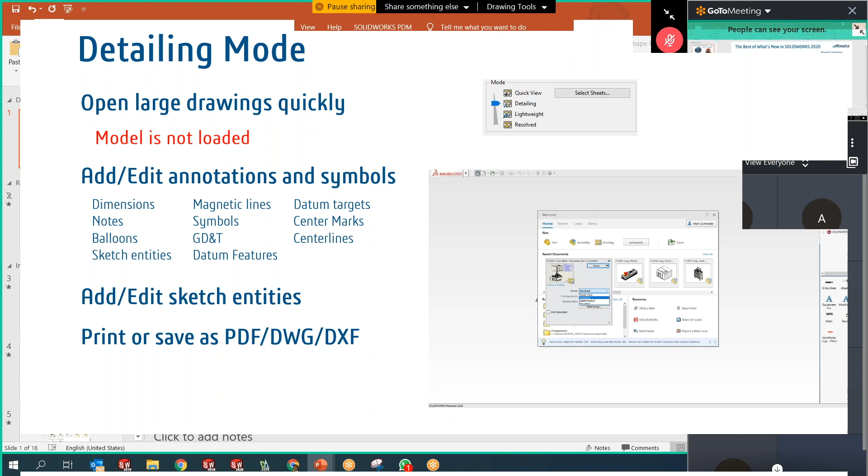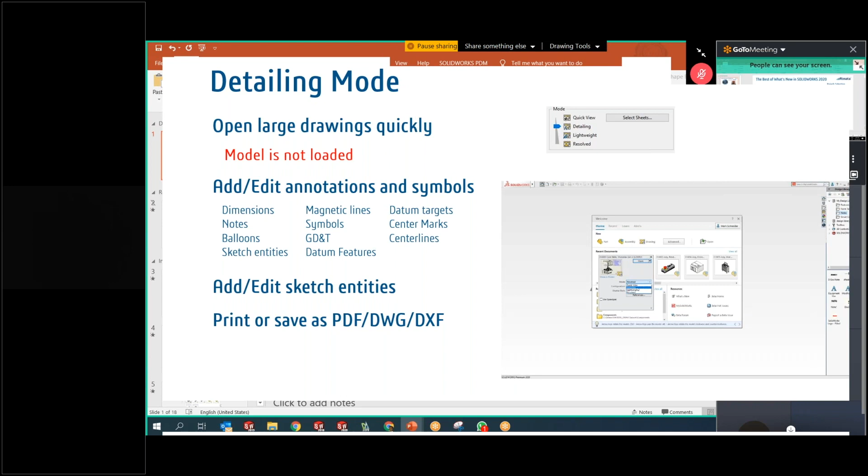Okay. In this case, the model is not loaded, so your system is able to take in more capacity of memory. It can handle more of the drawing's memory. And in this mode, you can also add and edit annotation symbols like magnetic lines, your symbols, your GD&T, your dimensions, notes. So all these features are available in this particular mode. You can add sketch entities, you can edit sketch entities, and also you can save this as a PDF. Okay, let's see this in action.

So here I'm opening my drawing, which is a really resource-intensive drawing. When I open my drawing, I have selected the detailing mode. So what SolidWorks does is it opens this drawing in the detailing mode, and you can see all my drawing sheets are available. So there is no loss of any data in the detailing mode. All my drawing sheets are available. You can see all the views, you can see all the dimensions.

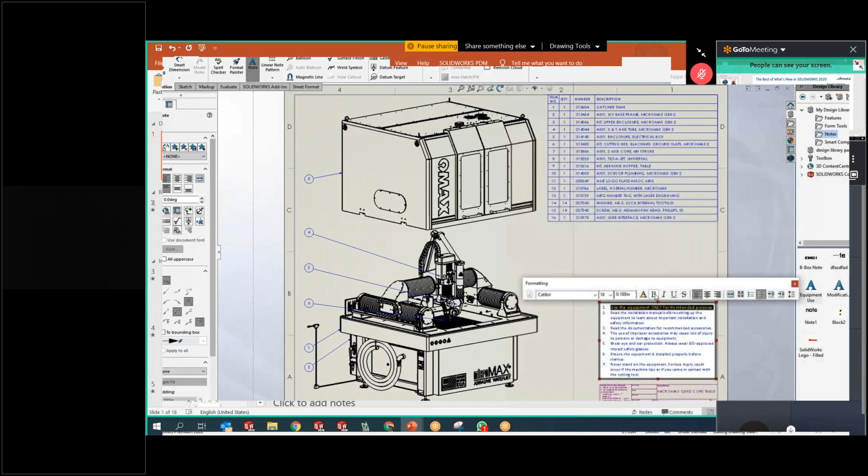Now you can also edit these balloons, put them to magnetic lines. You can edit notes, add notes. So this capability is there with the detailing mode. I can edit my notes quite fast. And remember, this mode opens the drawing very fast. Okay. So in this sheet, I need to adjust my view. I find this is more clumsy. I would like to shift this view to another sheet.

So I cut my view, I open a new sheet, and it's just as easy as pasting your view onto the sheet. So I just paste my view here, and you can rearrange your dimensions. So here I rearrange my dimensions. You can also make use of the ballooning option. You can make use of the magnetic lines, add balloons to your drawings. Adding dimensions is quite easy.

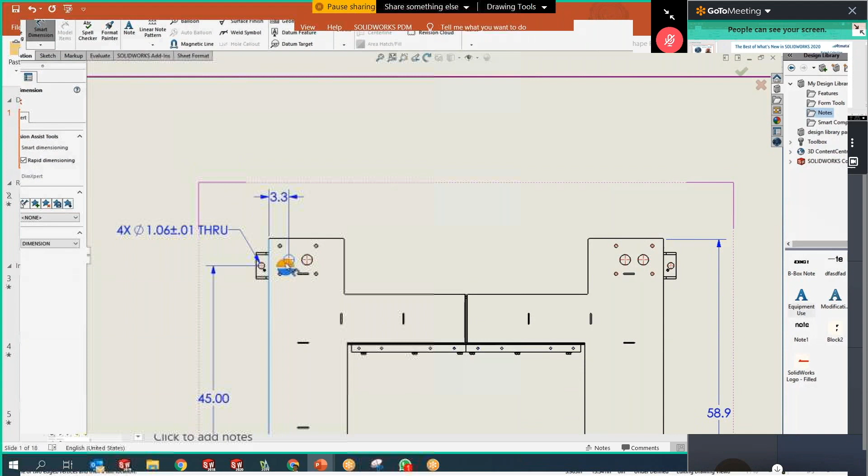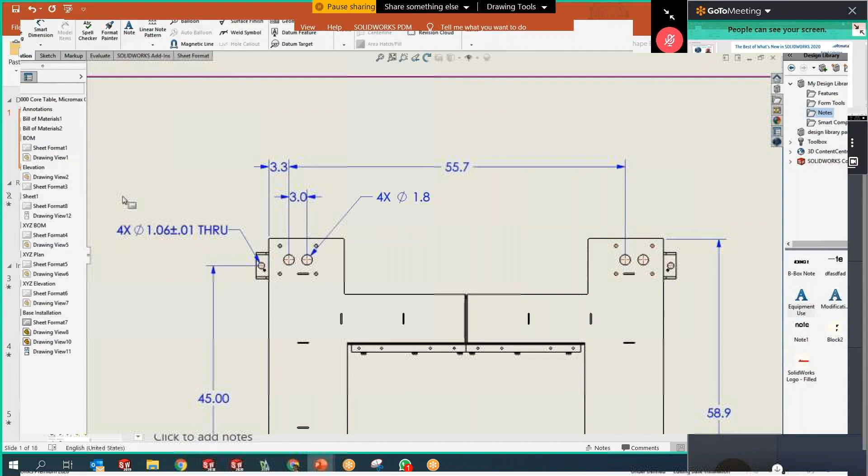So on the fly, I would like to just select entities of my scope. I pick entities which I need to dimension. It's just as easy as the familiar workflow of adding dimensions on the fly. Once my dimensions are added, I have the option to also add information to the dimension. In this case, I'm adding 4 as the number of holes. You have the format painter option where you can match dimension styles very fast. So what we see here is all capabilities are available in the detailing mode.

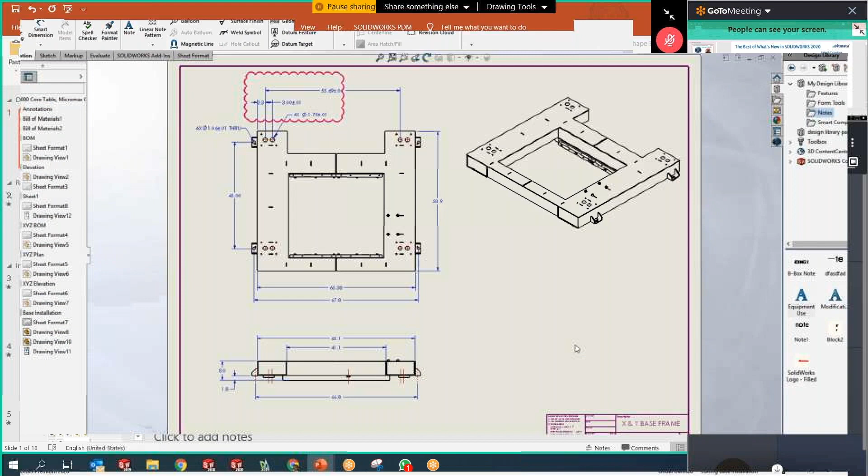So I put some revision clouds, and then I can also save my drawing. I can save this as a DWG, as a PDF file also. So let me save this as a PDF file. I have the option where I can select the PDF option, and you can see all the sheets are ready to be exported to a PDF file. So here I have all my sheets. I have all my views available in the PDF file.

So I would urge you to make use of this option. With this option, handling massive drawings is quite easy and quite rapid. You can open it fast. With all your configurations, and with lots of information in your sheets, it's easy to manage it with the detailing mode.

Okay, this is also related to performance, where some of the users say that when I open a large assembly, the performance of my system reduces. This can be because of various reasons. So we have an option where we use the large design review edit mode. The large design review edit mode is something where you can review large designs in your assembly quite fast. So you save time on your navigation. The time taken to navigate your assemblies, the time taken to modify your assemblies, you save time in the large design review edit mode.

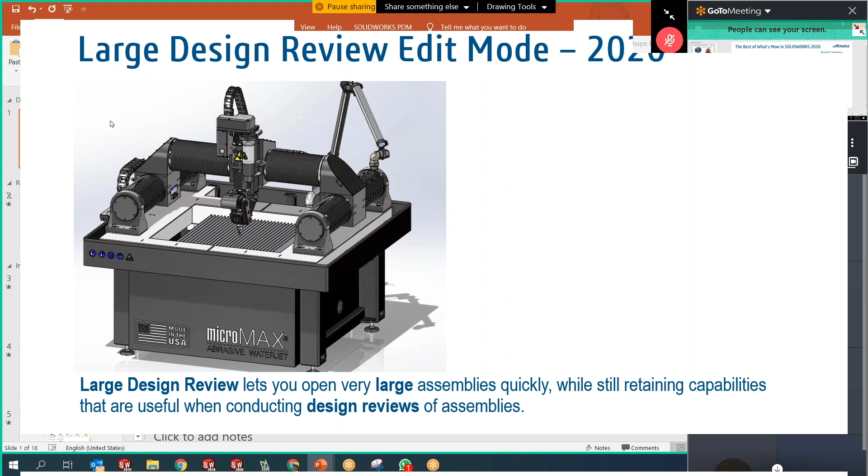So this was actually introduced in 2012. We have some options which were introduced in 2012, like you can navigate the feature manager design tree, selectively open components, you can measure distances.

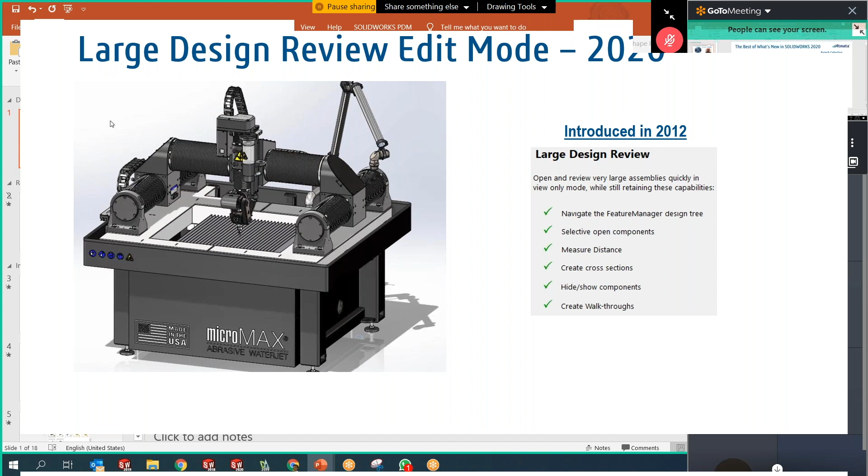So while editing the assembly, some features were added in 2012. Now with 2019, they have added more features into it. So we have options where we can insert components, delete components, move and rotate components. So additional features, additional capabilities have been added into the large design review mode.

In 2020, they have inserted some more features, which are more for quick access. So we have copy paste, so you can do Control-C, Control-V. You can drag and drop components into your assembly. Also, you can use Shift Tab, the familiar way of using Shift Tab in your assemblies, to hide and show components. And they have added the zoom to selection option.

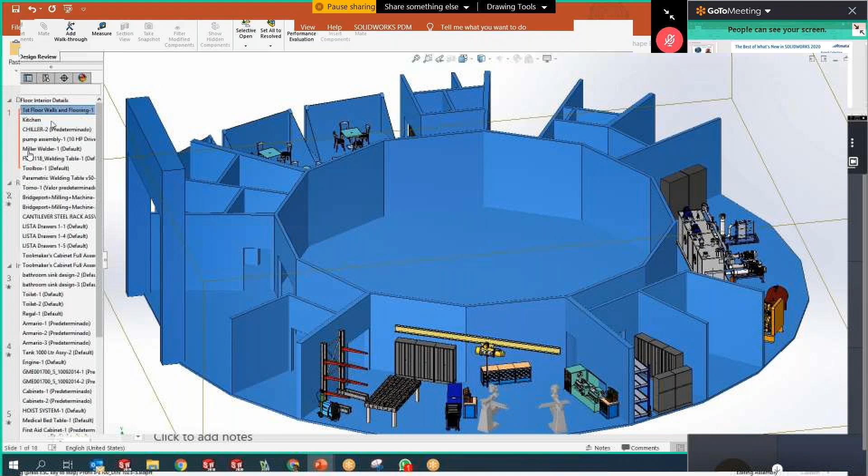I just want to show you this in action. So here I'm going to open a very large assembly. I'm opening this drawing in large design review mode. When I open it in large design review mode, as you can see here, only the lightweight components, just as graphics reference, have been loaded into the memory.

So it's very easy for me to navigate, to rotate. I can also use the measure tool in the large design review mode to measure components. I can create sections, view sections, use the section plane option. And also I can select components and hide and show them. So these options are available with the large design review mode.

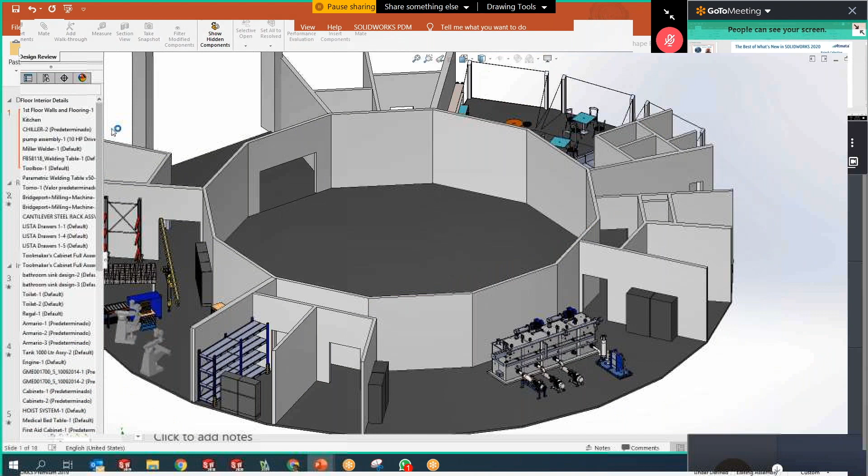If I want to edit a particular assembly, you just right click the component and say edit assembly. As you can see here, all the features related to that particular component are being shown. So it's been loaded into memory. So I have my constraints, my sketches. So I can show my sketches. Also, if required, I can select my assemblies and delete them.

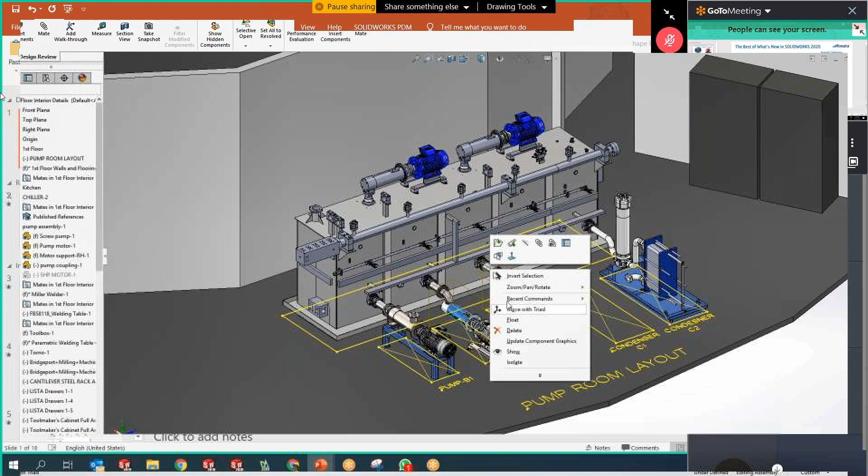So I can delete assemblies and also insert assemblies into this large design review assembly. So additional assemblies can also be inserted. And once I insert this component, let me constrain this. So I can use my constraints. The whole flexibility, the option to use my constraints, is available with the large design review mode. So let me insert another component, another sub-assembly here.

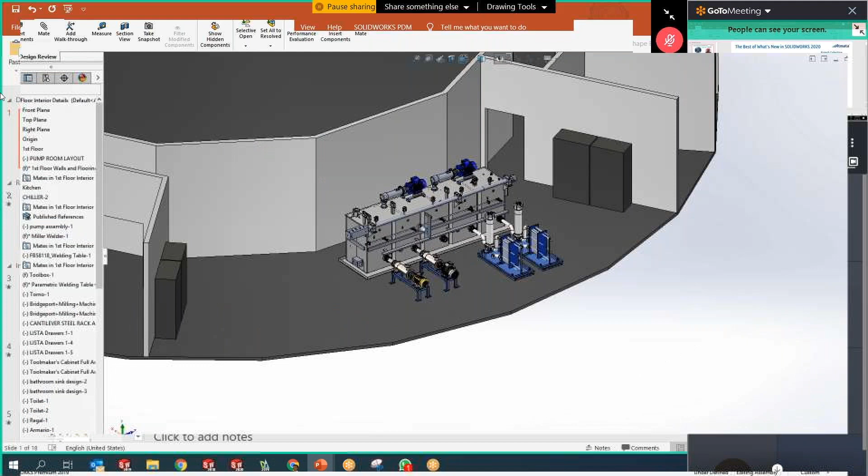And here you can see I've used the option for the magnetic constraint. I can also use configurations in the large design edit mode. So any components, any sub-assemblies with configurations can also be used in this mode. Hide and show hidden components is also available. So I can unhide them and I can save my assembly.

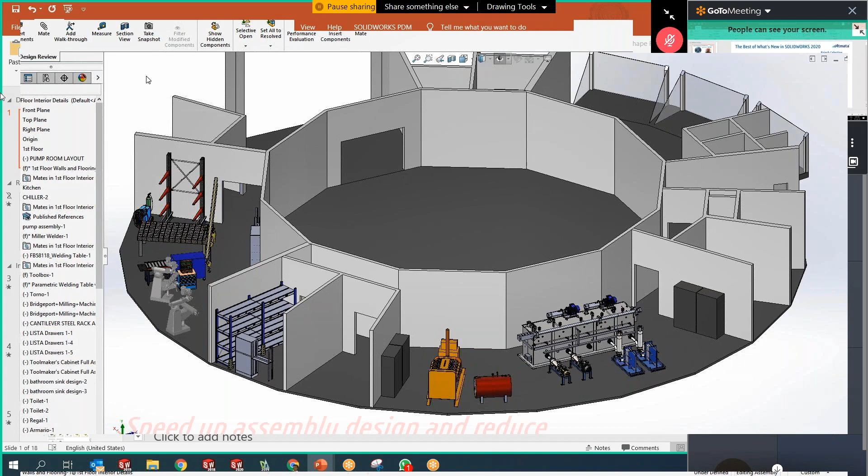So what we see here is that in the large design review mode, you can edit large drawings, large assemblies quite fast. So you can speed up assembly design and reduce visual clutter. So for most of your systems which have performance issues, like in large assemblies, you can use the large design review mode.

Okay, we have another feature called envelopes. Envelopes are nothing but a kind of external reference. They can be components or they can be a sub-assembly. In this case, I have an example for an envelope. You see here, I have a PCB and also a sheet metal component. In this case, my area of focus is on the sheet metal component.

So here what I'm going to do is transfer the mounting holes from the PCB onto the sheet metal part. In this case, I'm going to use my PCB as a reference component. So this is going to be an envelope.

Now we have a linear guide with a link arm. Okay, so I have a slider mechanism, in which the slider is being created as an envelope. Envelopes usually are not listed in the bill of materials. They are used as reference components.

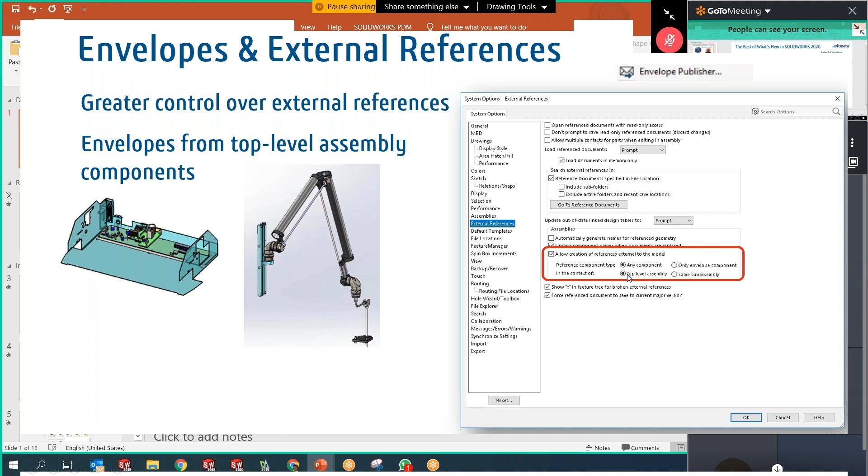Now with 2020, you have more control over the envelope components. Here in the system option settings, you have an option where you can set your envelope to any component, and you can also use the top level assembly. Okay, so let us see this in action.

So this is my Micromax abrasive water jet assembly. Here I have the option to create an envelope. What I'm doing here is selecting the envelope publisher, selecting the components to use as an envelope, and using them on a destination assembly. As you can see, I pick my destination assembly and I say add a group. When I make it a group, SolidWorks creates a group of my envelope to be worked with the destination assembly.

So it's easy for me to validate my design in this case. So as I keep moving my slider, you can see the arm also moves. So here I can constrain my arm and the slider to validate my designs quickly. So this gives me more flexibility on validating my design, as you can see.

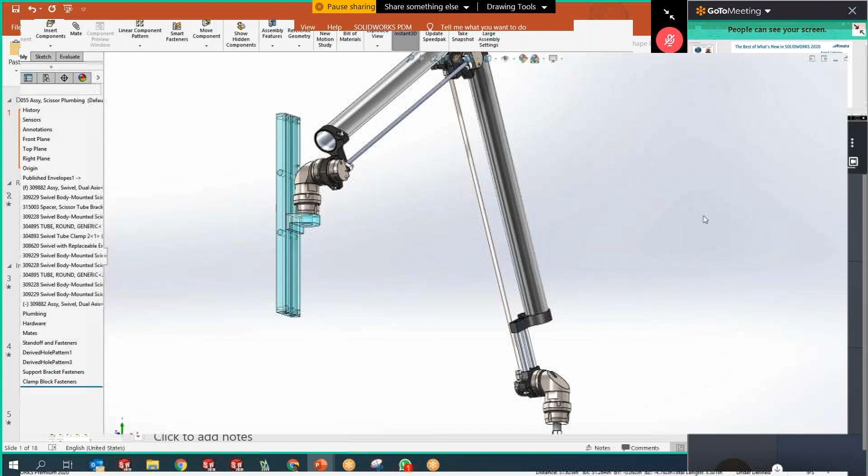Now see, it has a link with the envelope, with the reference component. But this component is not going to be linked in the bill of material. So it gives you more flexibility on validating your designs.

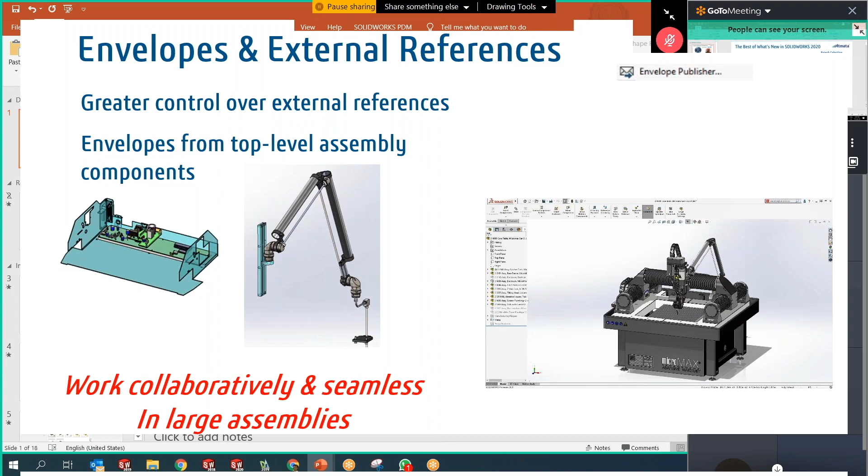Okay, we have another option which is called flexible components. So making components flexible. Here I have some examples of flexible components. I have some bellows. These are rubber bellows. As you know, rubber bellows expand. Sometimes I create a mechanism where I have to cover it, and I want to validate how much bellow expansion or contraction I have.

If I have to decide on the kind of bellow I need so that they do not stretch more than their limit, I can validate them in these kinds of designs. Also, you see they have a plastic hinge here. This plastic hinge has a kind of expansion and contraction when you actually open them and use the mechanism. In a similar way we have springs and so on.

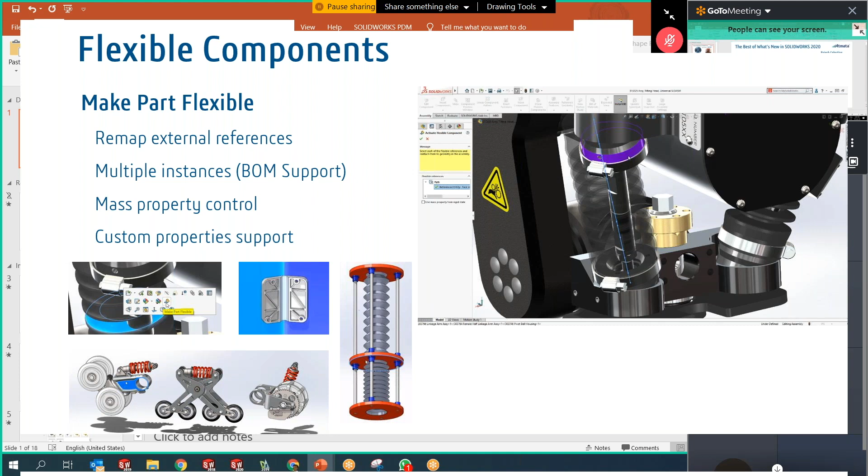So here we have an option where we can make the part flexible. When you make the part flexible, this is not going to change the mass of the part. It's going to retain the mass, and it supports multiple instances in the bill of material. You also have control over custom properties. Okay, let us see this in action.

So here I have the mechanism of the water jet nozzle. In this mechanism we have to validate how the nozzle is going to be focused. What is the angle of cut I need in this assembly? As you can see, when I move the assembly, similar assemblies move with it. These are some of the assemblies which have been made flexible. When I move the nozzle, all these 4 assemblies move with it. So they are made flexible.

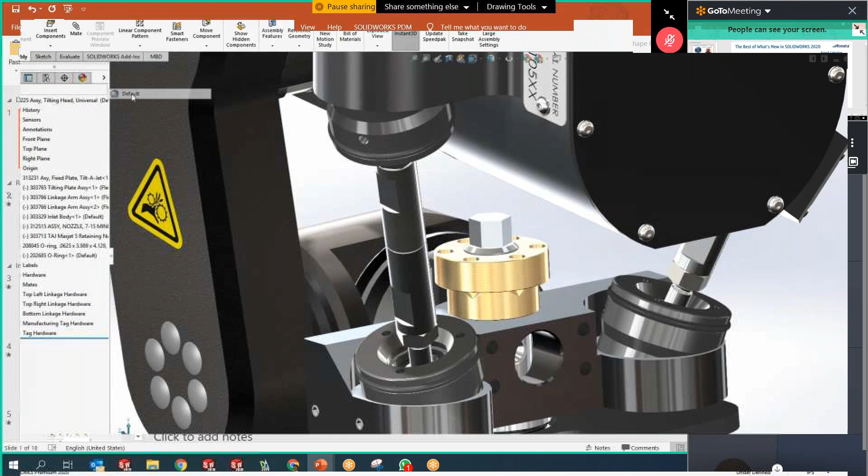Now I want to create a bellow so that the abrasive material does not enter the link mechanism. So here I have put my bellows. I'm just going to select my bellows and make the part flexible, and I'm going to map this to the initial fixed part. So I select it, make flexible, and map it by selecting the fixed part. So as I move my assembly, now this bellow has become flexible.

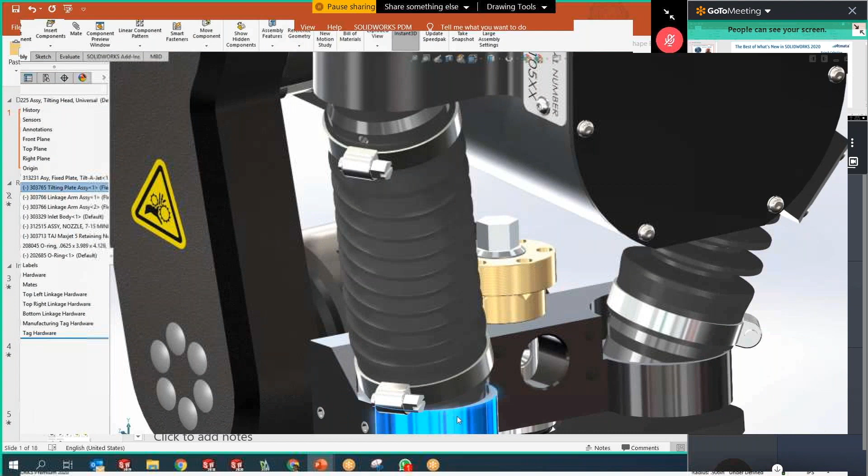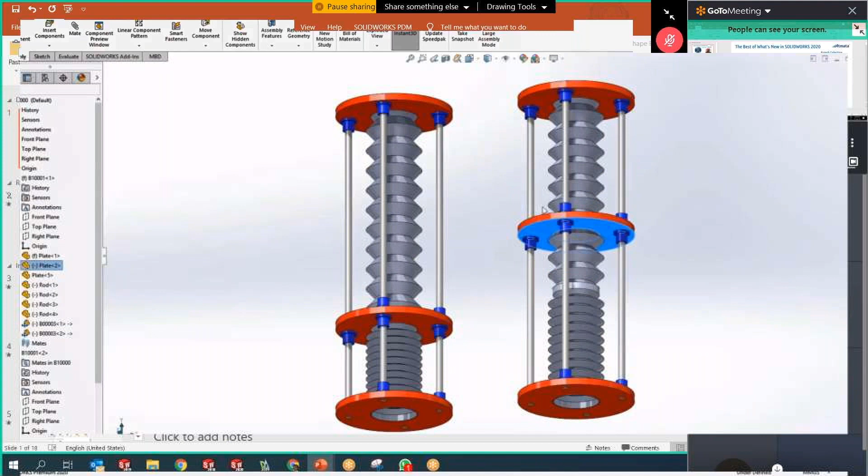So I will select my bellow and make my part flexible, and I'll fix the constant fixture. Wherever it is going to be fixed constant, I'm not going to move from that part. I'm going to fix that part. And as I move my assembly, you can see the bellows update. It works the similar way with the hinges and with the springs.

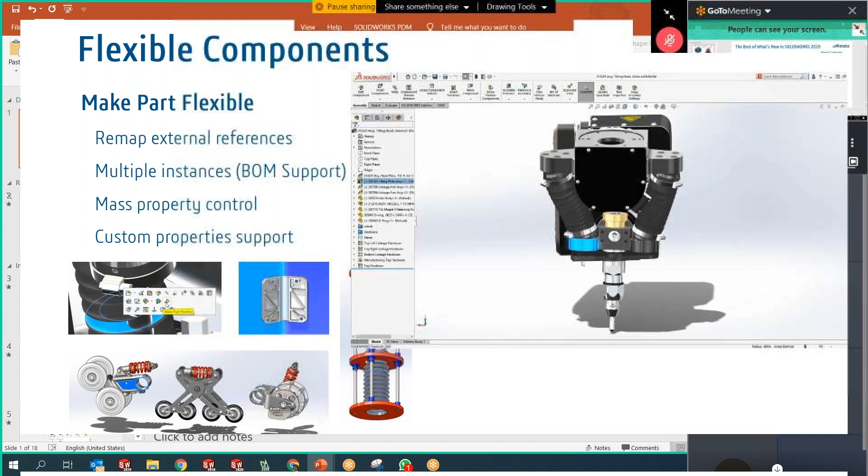So since the bellows expand and contract, there's not going to be any change in terms of mass or in terms of your bill of material. It's going to retain the same properties it has. So you can validate your designs quickly with this flexible option, making parts flexible. And you can also have a visual validation. I can visually validate if my bellow will suit this particular mechanism.

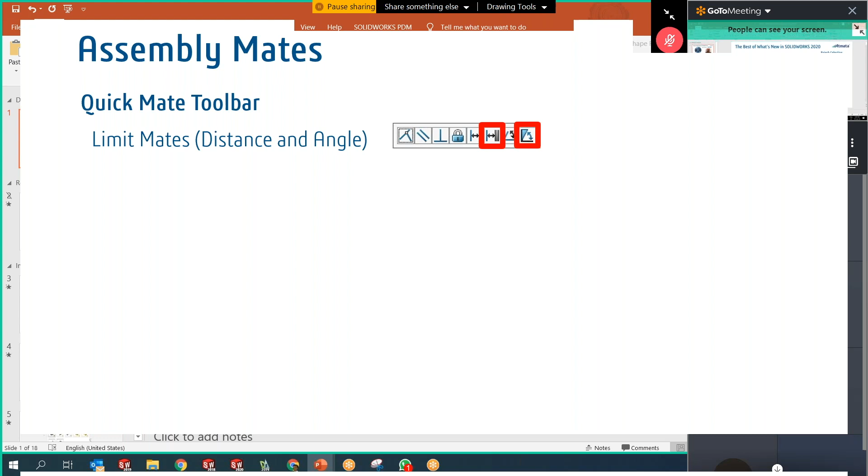Okay, assembly mates. Another thing we have in 2020 is the assembly mates. SolidWorks has added the quick mate toolbar for the distance and the angular mates. We also have sub options with the slot mate. When you use the slot mate, you previously had to move into the menu to achieve this particular option, which is now available on the fly.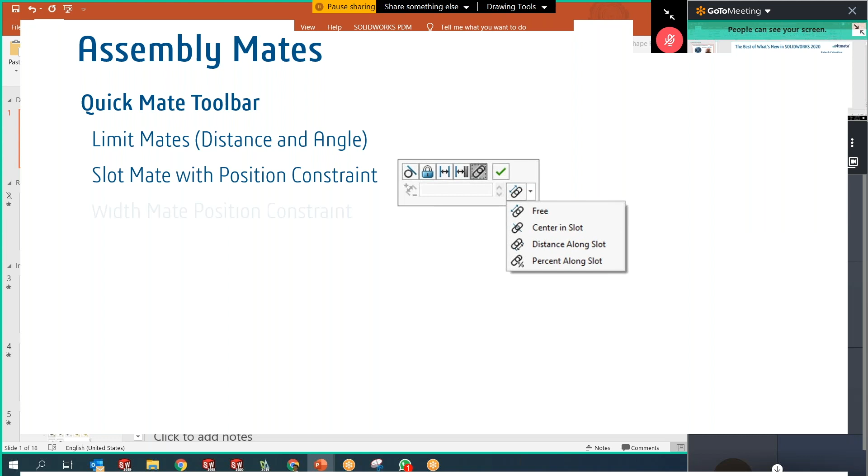And also for the width mate. There's a very good option called the flip alignment pop-up button. When you use the width mate, sometimes the component has to be flipped. So this option is available on the fly.

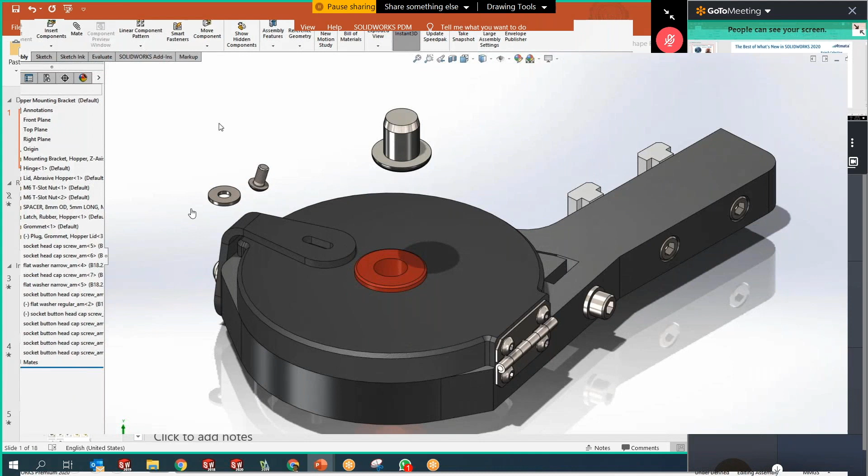So here I have my assembly. Using the constraints is now quite easy with SolidWorks 2020. You have a lot of options with which you can quickly do your constraints. In this case, I'm using the slot mate. I select the washer and the slot, and the sub options are listed here on the fly. So I don't need to move into editing options and then set my component.

Here also I'm using the profile mate. Now you see I should flip the screw. I have the flip option here, so I just select the flip option, and it's easy for me to flip the screw. Quite a handy option. In this case, I'm going to constrain this pin to the bush, and I have the concentric mate. And as you see, I have the flip option, which is very handy for flipping components.

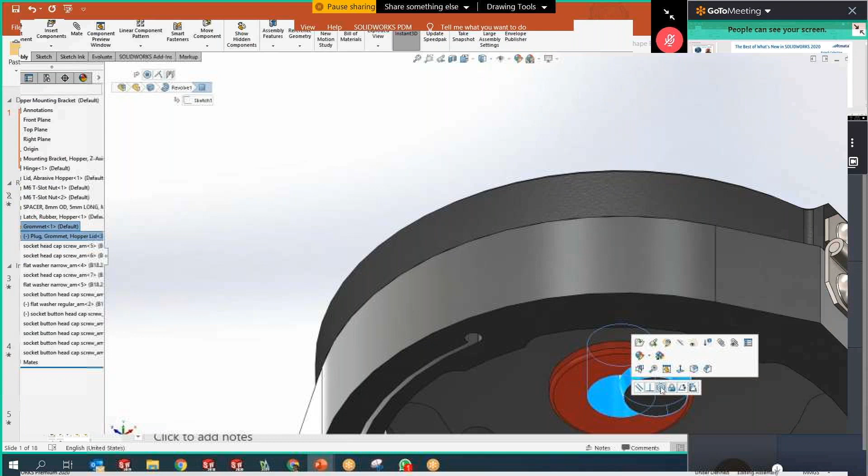So this is one of the productivity tools which will help you to work on the fly. As you're working in the graphics area, you have the options to flip components with the mate.

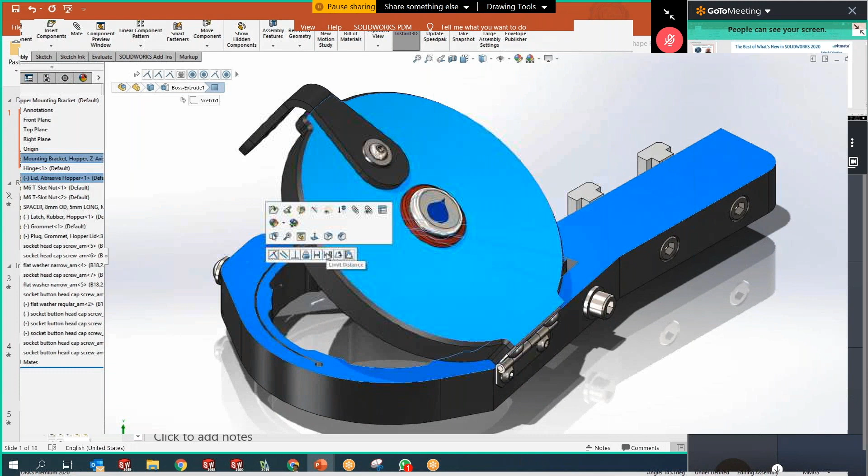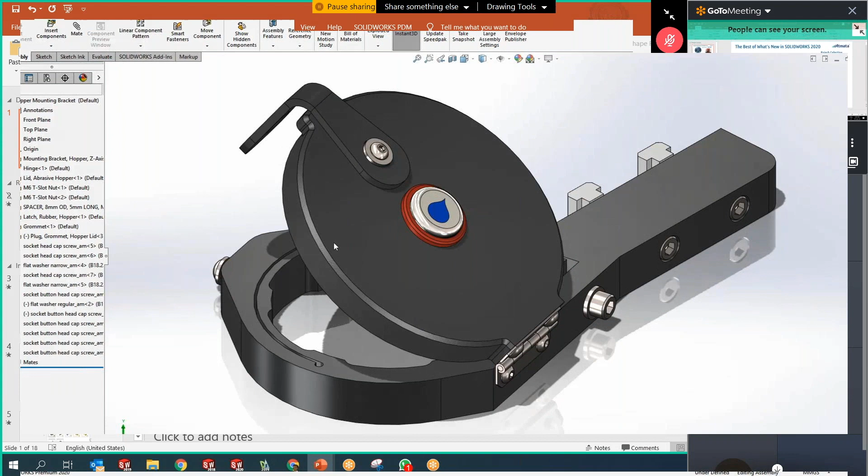Now, coming to the angular mate. I need this cover to be at an angle. So here I have the limit mate, for the distance and for the angle. As you can see, SolidWorks has given the options on the fly where I can enter the minimum value, the maximum value and the total distance of travel. Here I have a minimum of 0 and a maximum of 90. These are some of the handy options SolidWorks has added so that the user can be more productive while using mates or constraints in the assembly.

Assembly patterns is one of the enhancements introduced in 2020. We have the pattern driven component pattern, so you can derive the orientation. For example, I create a hole through the Hole Wizard, and then I pattern this hole, so it is in a group of a pattern. When I put a fastener on it, to pattern this fastener onto this hole pattern, it's as easy as selecting the component and selecting the pattern of the hole feature. This is what we call the pattern-driven component pattern.

As you can see here, I have the orientation of my bolts, my fasteners, on the opposite side. With this pattern-driven component pattern, SolidWorks has the intelligence to identify the orientation and position your bolts based on the hole. So we have this option in the pattern driven component pattern.

Then we have variable linear and circular patterns. Usually we create linear patterns as well as circular patterns. Now you have the option where you can select individual components or individual patterns, and specify the variable distance in terms of linear and circular angular measurement.

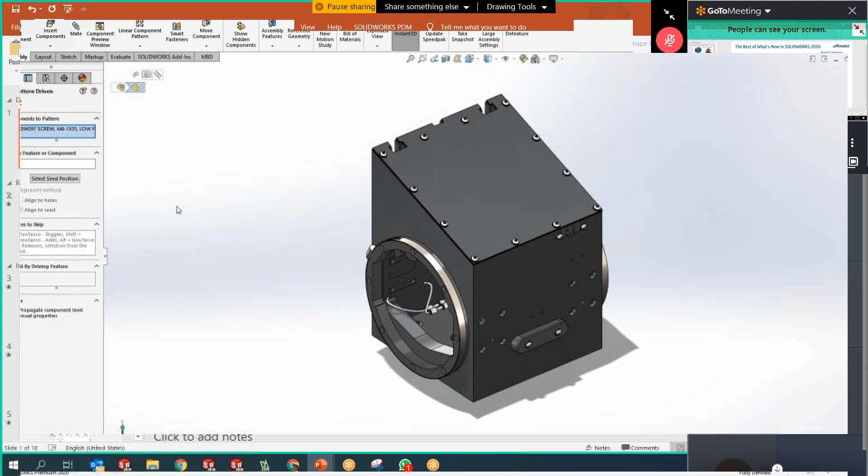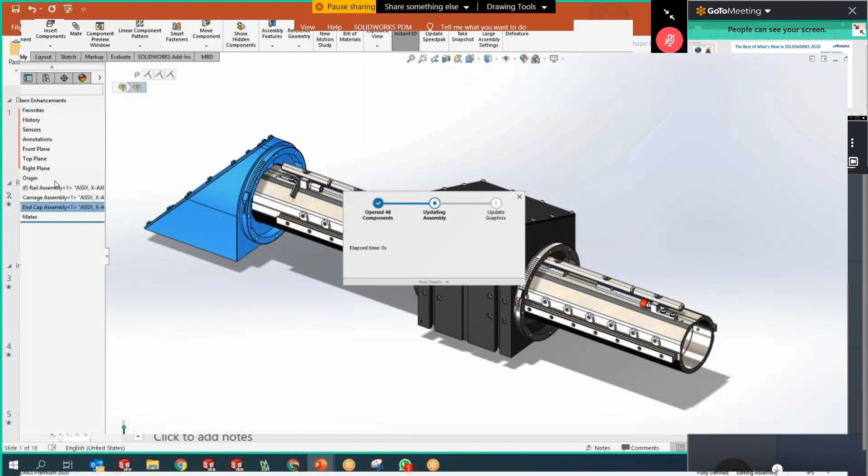Let's see this in action. This is an assembly with mostly symmetric components, a lot of patterning here. So here I've created a Hole Wizard hole which has been patterned. I select my existing pattern, and you can see the orientation of these fasteners. Their heads are automatically positioned. You can see the hexagonal heads, and the orientation has automatically been selected. So intelligent positioning of your components is available with the pattern driven component option.

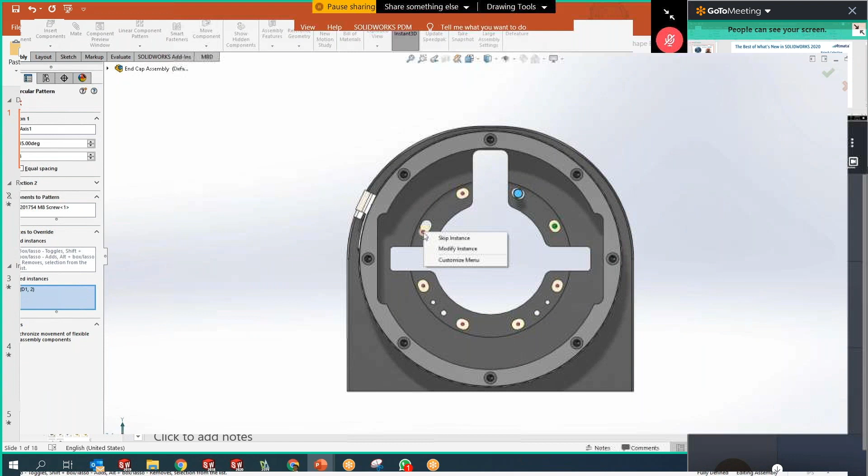And here I'm going to do my circular pattern. By selecting my axis, I create a circular pattern. Once I do my circular pattern, I can select individual instances and change their values. So here I have a variable circular pattern. I can pick an individual instance, modify it and specify the angular measurement for the circular pattern. The same is available with the linear pattern.

Now mirroring components: I can just pick my component and mirror it. As you can see, options are available here on the fly, so it's quite easy for me to select the options at one go. I also have an additional option called align to origin, or component origin. I select the component origin, and this is a new option introduced in SolidWorks. The other mirror options, left hand side, right hand side, top, bottom, left, right, are available at a single go. So at a click, the user can validate what kind of mirror option he requires based on his design.

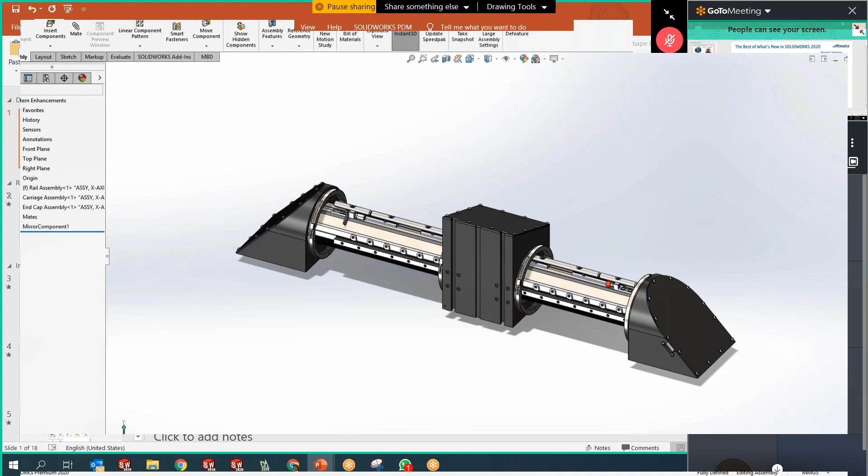So here you have minimized, or there are a few patterns which you are going to use in this. It is more powerful, and you have more control over your patterning features.

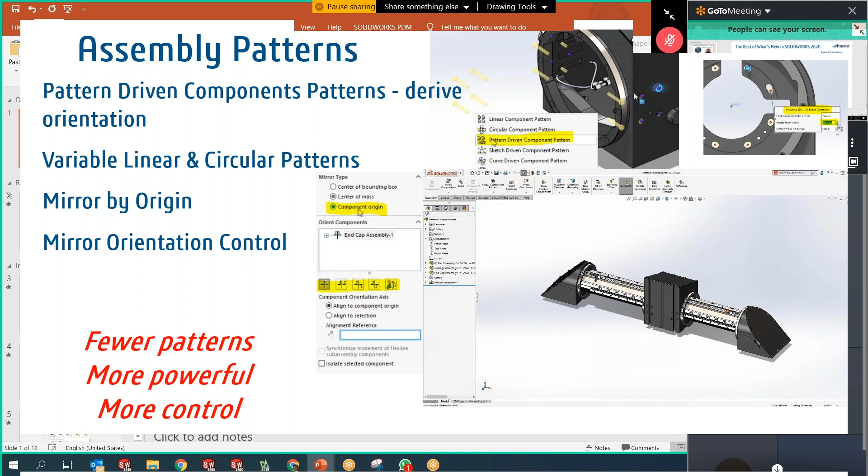Okay, another option here is 3D Interconnect. Let me brief you about what 3D Interconnect is. It's a kind of inbuilt plugin with SolidWorks where you can drag and drop native format files or neutral CAD files into SolidWorks.

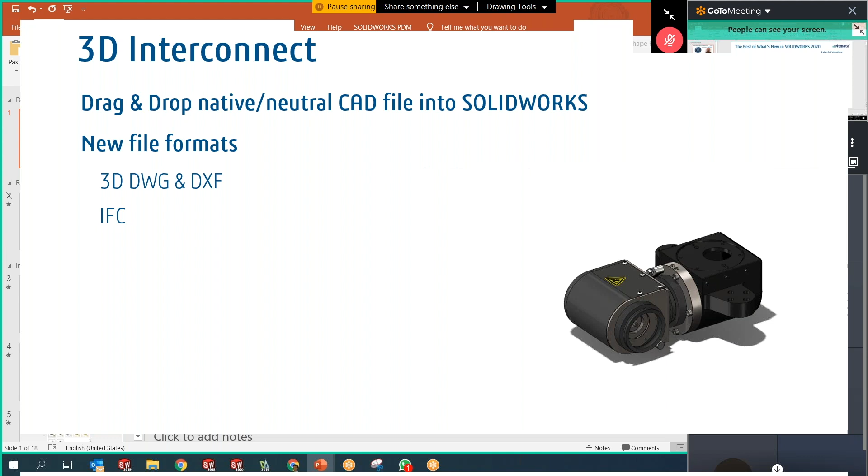So in this option, what we have is step files, DWG files. Now, new file formats have been introduced. So DWG files, DXF files, and IFC files are also available now with this 3D Interconnect. There's no need for the user to open the file, translate it, export it, and save it as a separate file to use in SolidWorks. It's just a drag and drop.

So with 3D Interconnect, what we have here is we can just drag and drop components into my drawing. So here I have a file which is a step file. I just drag and drop it into the drawing, into my assembly. And it's just as easy as constraining them and reusing them into the assembly.

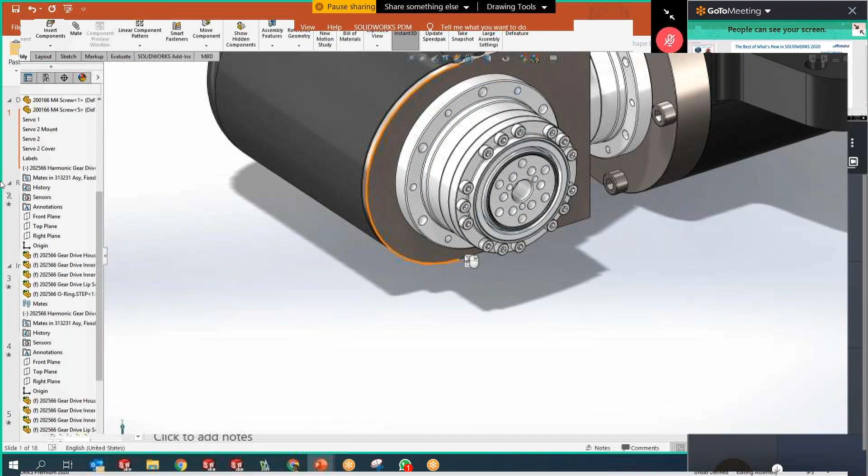So remember, 3D Interconnect is something which has a link with the original file, and whenever you update the original file, it also updates. So it has a seamless workflow between other softwares and other formats.

This 3D Interconnect also has a link, you can use it for Inventor files, Pro E files, CATIA files. SolidWorks Premium, the top level, has a collaboration with CATIA, so you can use 3D Interconnect with CATIA files also. So if you're collaborating with other softwares, you can use this option to seamlessly work with the components and assemblies.

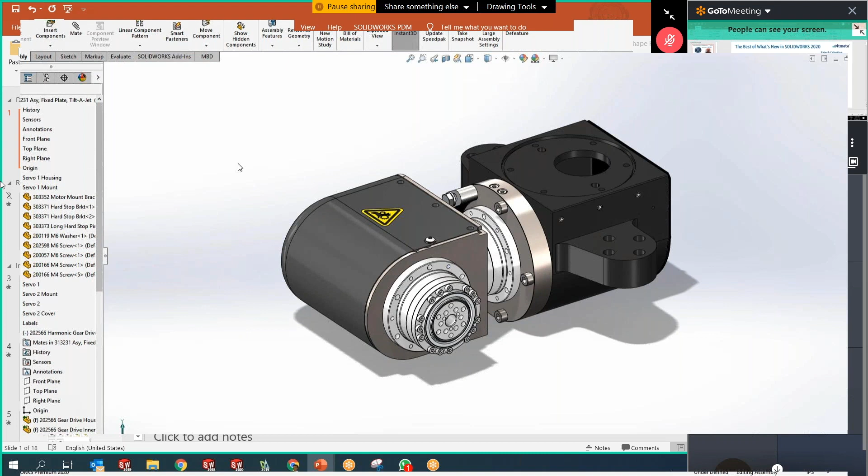Okay, now this is something to do with your STL files. Usually I identify this as most 3D printing companies will have to do some modifications to their STL files. So here with STL files, now you have additional options where you can edit them.

So with this, what you have is additional tools, which is called the mutual trim. With the mutual trim, you can trim surfaces.

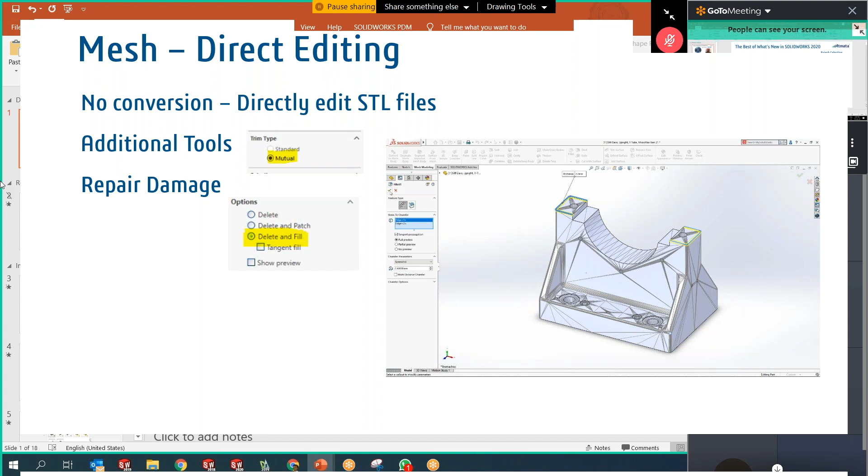Another new option introduced in 2020 is repair damage, where I can delete and fill. SolidWorks automatically deletes the patches and fills the surface.

This option is very handy and useful, where I can select the edge and apply a fillet, just by selecting the edges. I can also convert my fillets to chamfer. So editing is quite easy with this.

Now in this case, I would like to increase my radius, so I can use the surface offset. Here I'm going to use a surface offset of around 5 mm, and extend my surface. This is the normal way of working with surfaces, a familiar workflow. Using the created surface, I can trim and remove the additional surface inside.

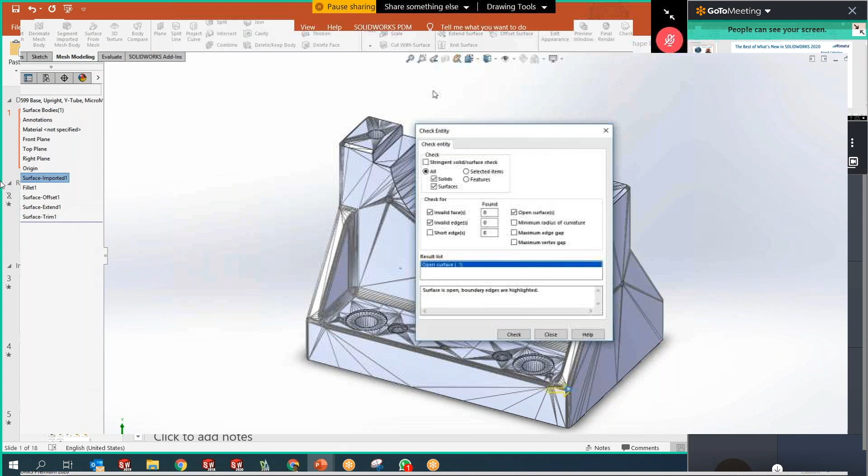So by this, what I do is increase my radius. When I run a check on my model to see if any openings are there, if there is anything open and not knit, SolidWorks identifies that this portion is open. So I can just delete it, and SolidWorks deletes and patches the hole.

Now here I have some bolt holes which I want to delete. It's as easy as selecting them and deleting the face. What we see here is SolidWorks deletes these holes and patches the surface, making a normal surface. So I save a lot of time on editing with STL files.

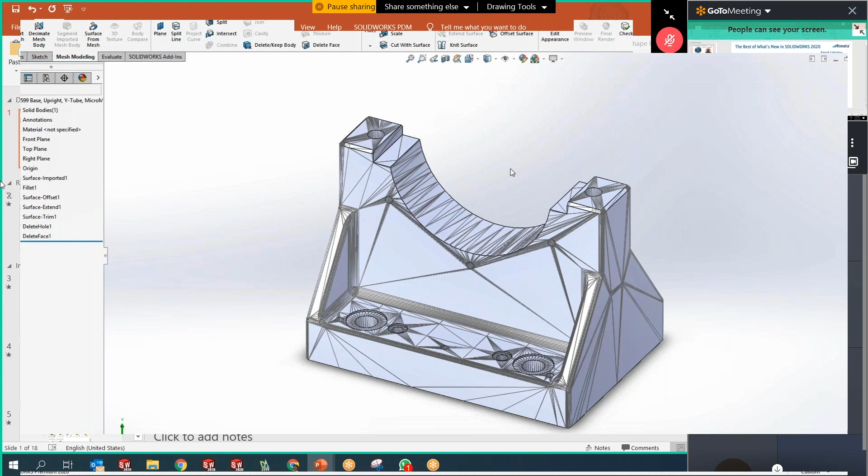So this is a kind of tool. These STL files - I think companies with a lot of 3D printing capabilities use this kind of STL files, which has a lot of options where you can edit on STL files. This is what we have: mesh decimation and body compare.

I would term this as useful for inspection. Sometimes you might have cloud data where you make it a mesh and you would like to compare it to the original part - that's one option. Another option is if you have performance issues, if you're using meshes which are very dense as a reference component, it can be a bottom component or a reference component. So if you're using this kind of mesh to make the drawings lighter, or I want to use some features from the existing mesh, this option will help you reduce or decimate the body, and also I can compare it with the original file.

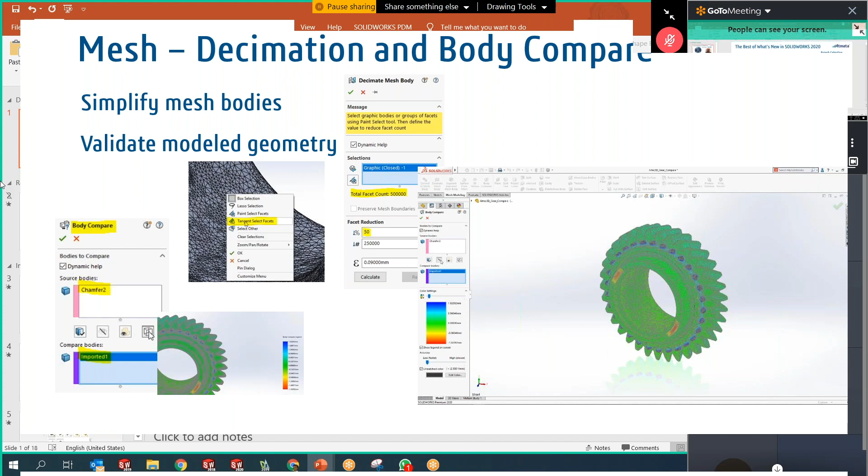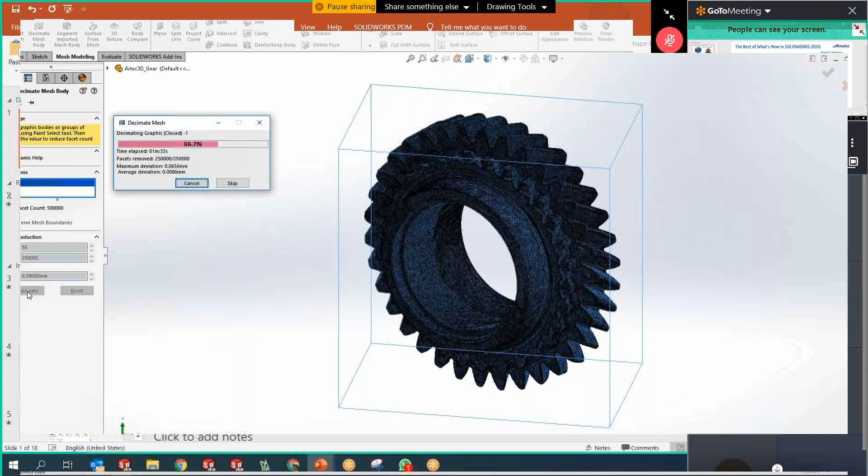So here, what we see is I have a gear - this is a gear wheel. I'm going to decimate it. In this case, I have a facet count of around 500,000, and what I'm going to do is reduce this by 50%. So my facets are going to reduce to around 250,000. SolidWorks runs the decimation, and then it gives me a final model with a 50% reduction count.

Now I have an option where I can use the tangential surface or the tangential facets to create an axis. This is one advantage of creating reference geometry in your mesh model. So I can just select my tangential references, and you see SolidWorks creates the axis for me.

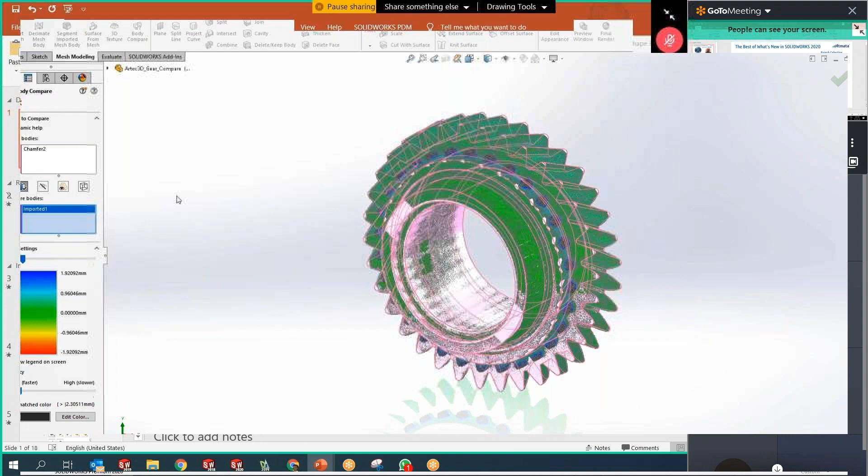Now here I have the original part, and this is the mesh body. So I have an option where I can do a body compare. This is going to help me compare the bodies, and it's going to give me the difference in terms of measurements. As you can see on the right side, based on the color coding, I have the difference between the original and the mesh body. This is a very good handy option you can try for inspection. Suppose you're doing inspection on certain components - you have the cloud option, you have the mesh, and you can use this to check the difference.

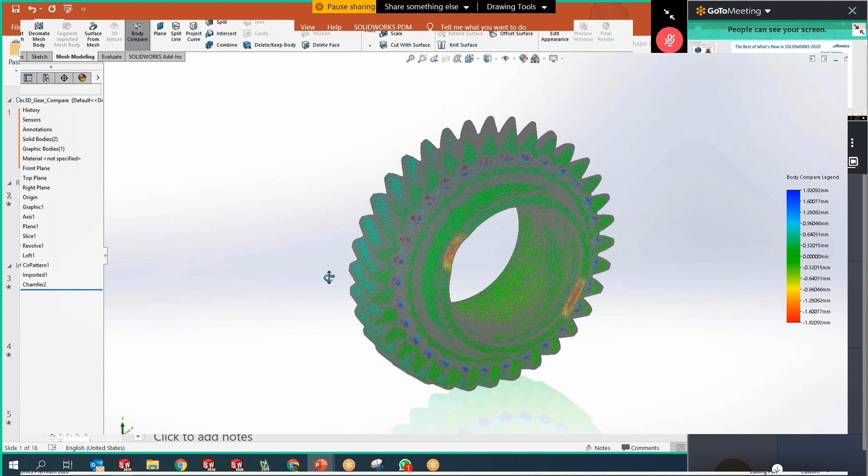So remember, this gives a very increased performance when you use it in an assembly. Try to reduce your facets, and also you have a visual verification of the original part against the mesh body.

So with drawings, we have additional new options I introduced. This option has to do with whatever dimensions I'm going to place - they should be in uppercase. So you have to do your settings for this, and also settings for drawing scales. Previously, we had to click in and go into a lot of other options to set the drawing scale, whereas in 2020, it's just two clicks.

And then a new feature has been introduced into SolidWorks, which is called chain dimension, which is very similar to the baseline dimension. So you can create a chain dimension as well as a baseline dimension.

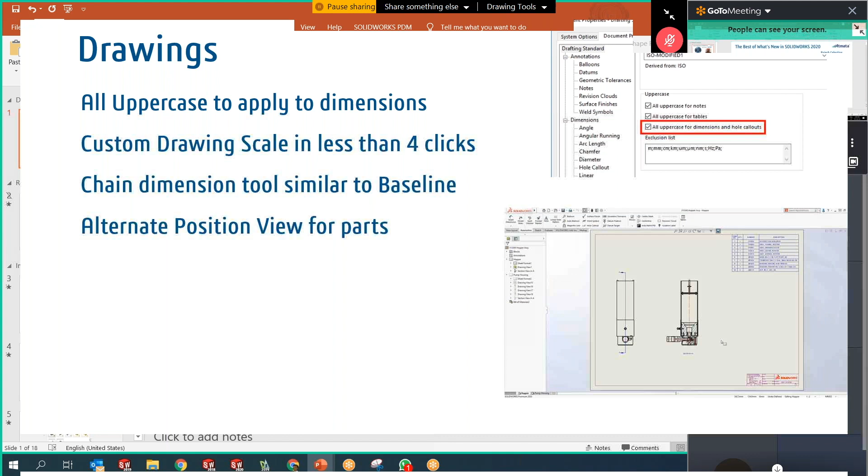Alternate position views for parts is another option - let's see this in action. So here I have my drawing sheet with two views. In the previous method, what we used to do is go and it used to list the drawing scales here, so I could select whatever scale I wanted from the list.

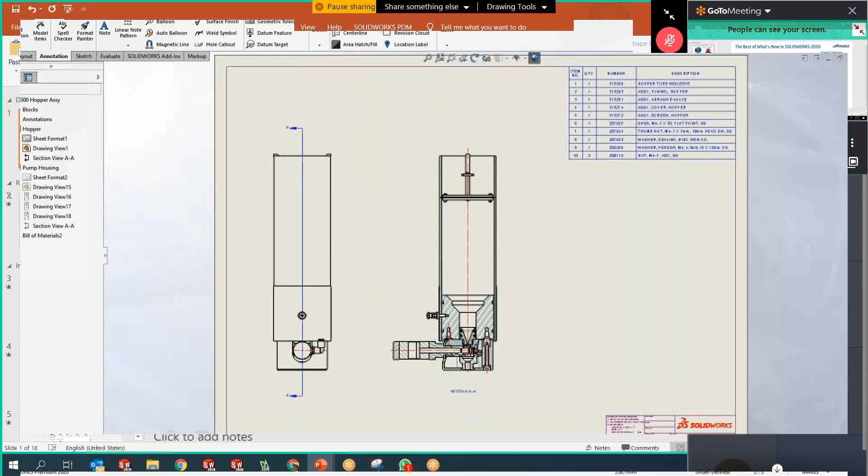Now, for adding additional scales, SolidWorks has given the option to create a TXT file, so I can add my custom scale there and change it. Now, changing drawing scales is quite easy - I can just click on the sheet, use the user-defined option, and enter my scale here. It's quite easy, so you avoid a lot of clicks while setting your scale.

So creating a detailed view, as usual, it was a scale of 2:1, which is 2 times the original scale. Setting detailed view scales is also quite easy - you pick the view and just change your scale on the fly.

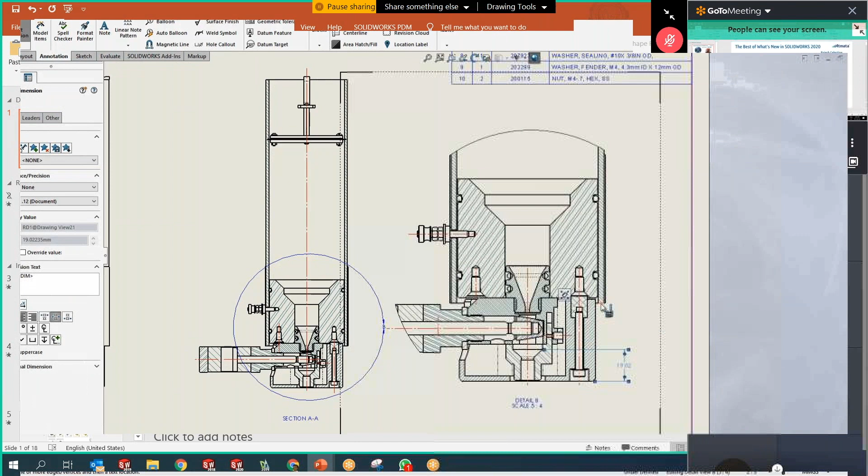Now here I'm going to add chain dimensioning. I select entities of interest, and as you can see, SolidWorks adds the chain dimensioning. I can also add an overall dimension to this chain dimensioning - once I right click, I add an overall dimension. I can also delete dimensions, and you see the overall dimension adjusts itself.

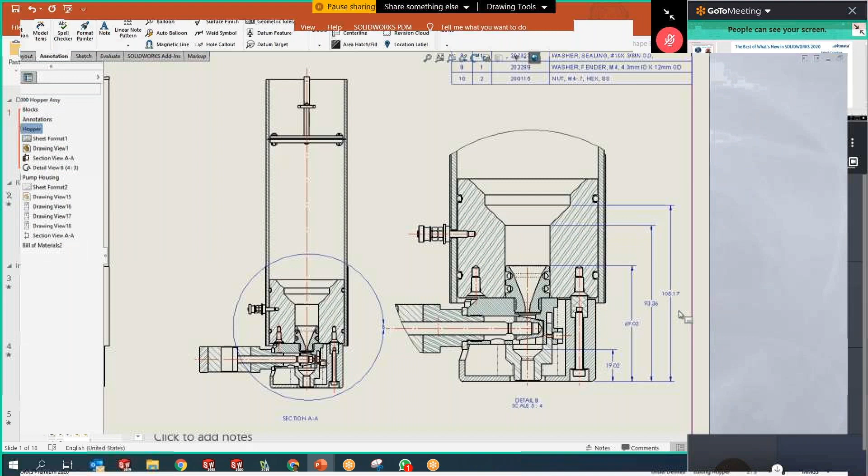So it's quite easy - I can convert this chain dimensioning into baseline dimensioning and vice versa. These are some of the handy options you have to create dimensions.

Now in this case, I have a pump housing, and I'm going to represent the casting part and the machined part in the pump housing. So now it is available to define or show alternate position views for the casting and the machining part. Once I superimpose both parts, it's easy for me to define the difference between the machined area and the casting area.

So quite a very good handy option for you, those who are into casting and machine parts. These are new features which have already been introduced into SolidWorks 2020. So here you have a continuous workflow, and there's a lot of improvements on the drawing environment.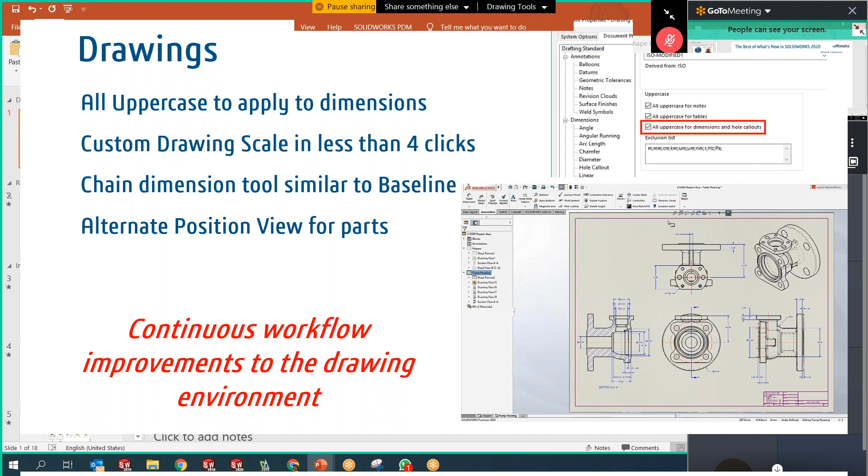Now we have the structure system. With the structure system, creating massive structures or more of similarity can be done very quick. It's very rapid, very easy. More flexibility and more control has been given to the users on the structure system. The structure system is a type of advanced weldment, and it comes from the advanced weldment module.

Here you can select lines, you can select planes, you can select points to create your weldment assemblies. So here we have two things you have to remember. You have the primary member—whichever member is the first which you place is called the primary member. Connecting these members is called the secondary member.

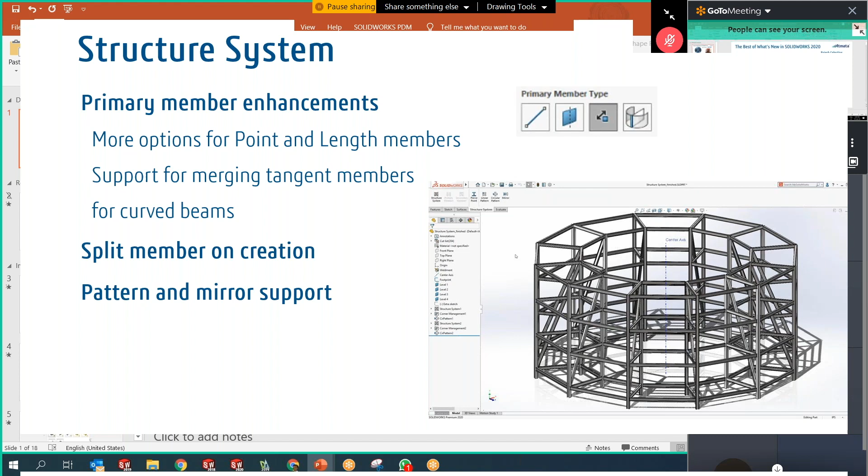You have more control options where you can specify points on these members. So merging these members is another challenge, and creating corner joints and edge trims is another challenge. You have more control over this. You can also split a member on creation, and you can pattern the structure system—the mirror and the pattern both support the structure system.

As you can see here, this is my structure system. Just imagine doing it in weldments and creating a lot of 3D sketches—it's quite tedious doing it in weldments. With the structure system, it makes it much easier.

So what we have here is, as you can see, I have a drawing, a simple drawing. I have 4 planes, I have 2 sketches, and I have an axis. So in this case, I switch on my structure system.

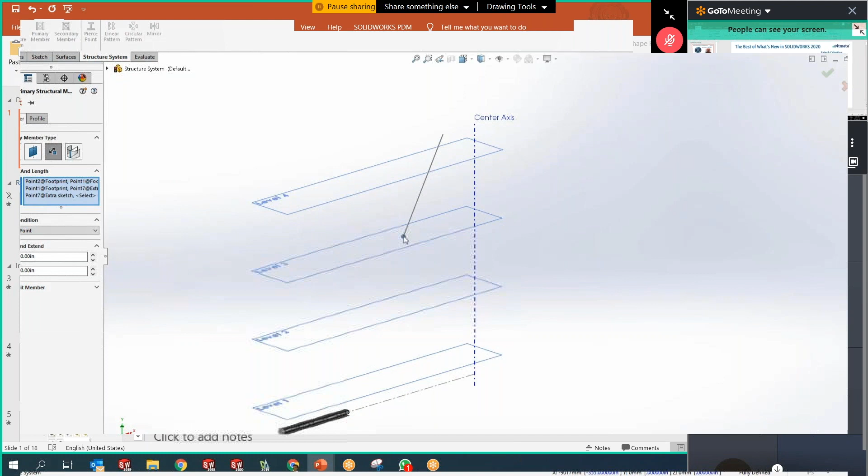I start with the primary member. As you can see, I select the point option, and here what I have is I can create members by selecting points. So I just pick points, and you see SolidWorks creates the members for me. In this case, if I want to merge both members to a single point, I can just pick the point, and SolidWorks merges both the members to a single point. So it has more flexibility with the creation of members.

I can also select the plane, up to plane, and all the members will reach up to the plane. And also I can select a sketch and align it to the sketch.

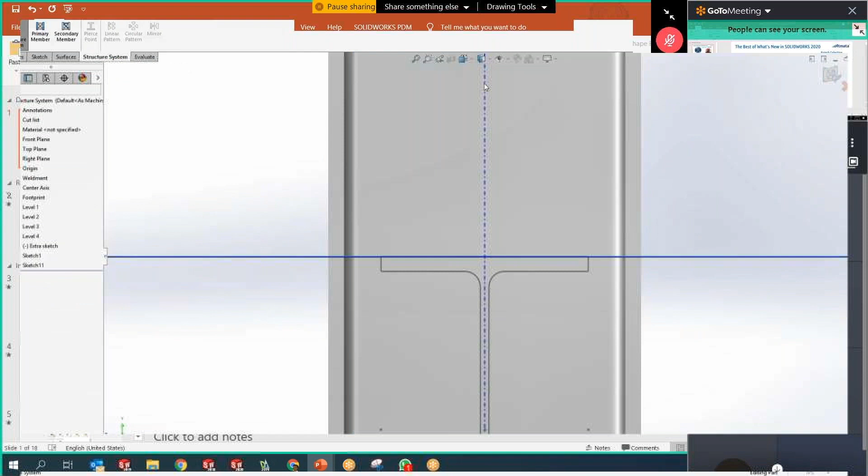Now, once I created my primary members, I will add some secondary members where I can select my primary members, select my plane references at what level they should be created. I can select the type of member, and also align my secondary members. So positioning of secondary members is also made quite easy.

Let me add a few more members to this. I'll add a cross brace. Now in this case, I'm connecting the cross brace at an angle, and it should actually be trimmed at those particular bodies. So here I can define my type of profile, select the orientation of my profile, and the rotational direction of my profile.

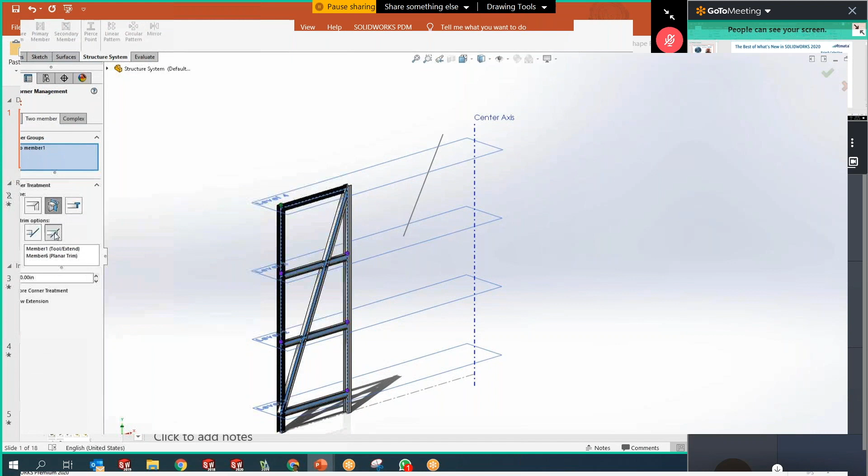Once I exit my structure system, it will ask me for the edge trim—what kind of edges you require. So I have the option here to select the type of edge trim I require and to select the order of trim, which member should be trimmed first, second, third, and so on.

So it is more flexible and quite easy than the weldments. And you can see here, it has trimmed my members quite well. So this is what I needed for the design.

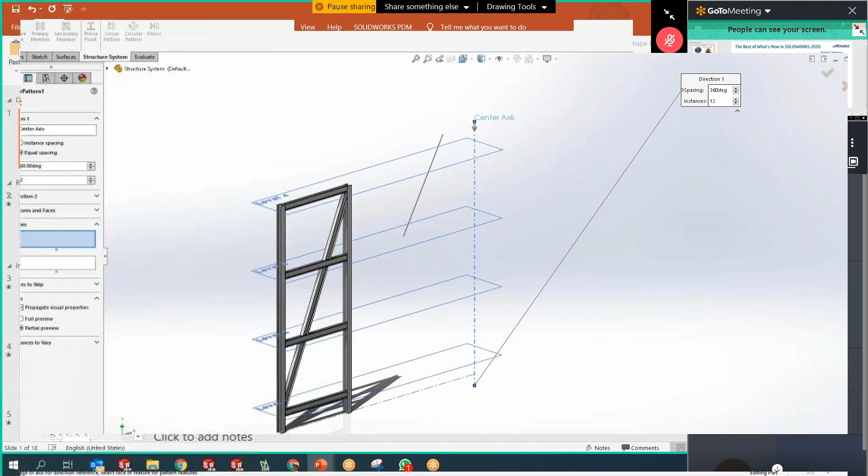For circular patterning of the system, as you can see, there's an option here where they have introduced the structure system option. So I can just pick my structure system, and by selecting my center axis, SolidWorks patterns the whole system. Now, once I have patterned my system, I would like to connect these. Now these are the primary members, and I'd like to create a secondary member between these two.

So I just select my primary members, and here it's the same thing. I pick my planes. So at every level of this plane, I need to have a connection. So here I have an option where I could orient my secondary member. So I pick my secondary member, and SolidWorks, now once I exit it, asks me how do you want the connection between the members. So I define the type of edge trim, the connections, and the order of trim, which is quite easy and handy with the structure system.

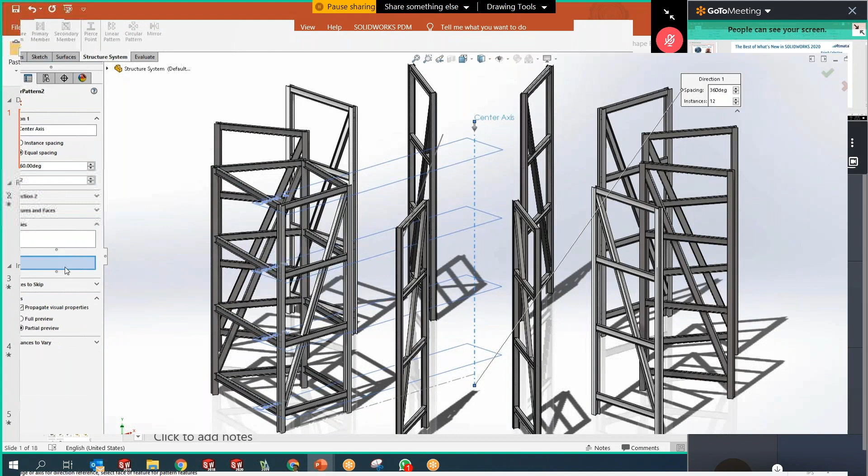And now this becomes a system where I can pattern this whole structure system around this assembly. So using the structure system for creating massive assemblies is quite easy. As you can see, it is more of the advanced part of weldments. So you have good control over your weldments. So in future, what you can do is you can start implementing this, and you can check how flexible, how much control you have on your structure system. It's quite easy, quite handy.

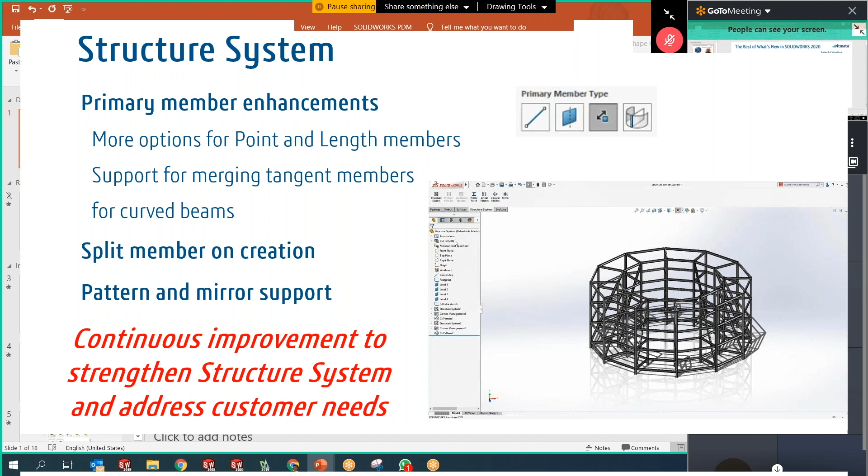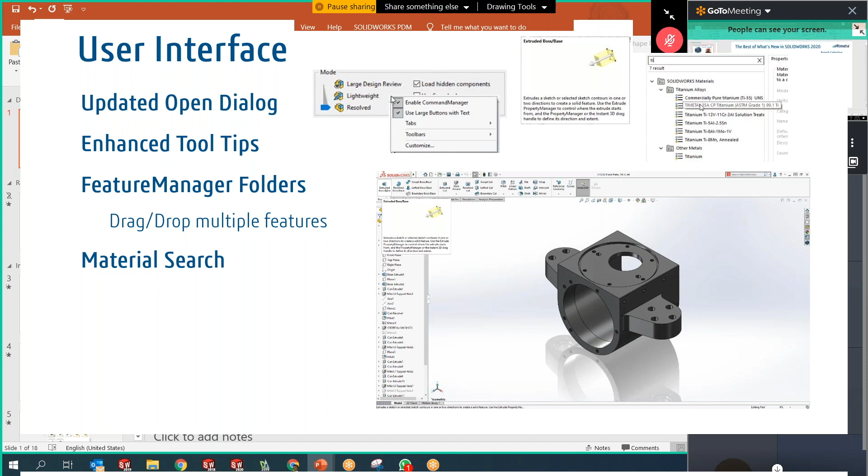Okay, let's see this in action. So here, it has a neat open dialog box, what you can see here. And also we have the modes as a slider bar. So I can move the slider bar to whichever mode I want, resolved, lightweight, large design review, and I can open my file. The toolbars, the tabs are very neatly categorized, and it's easy for selection.

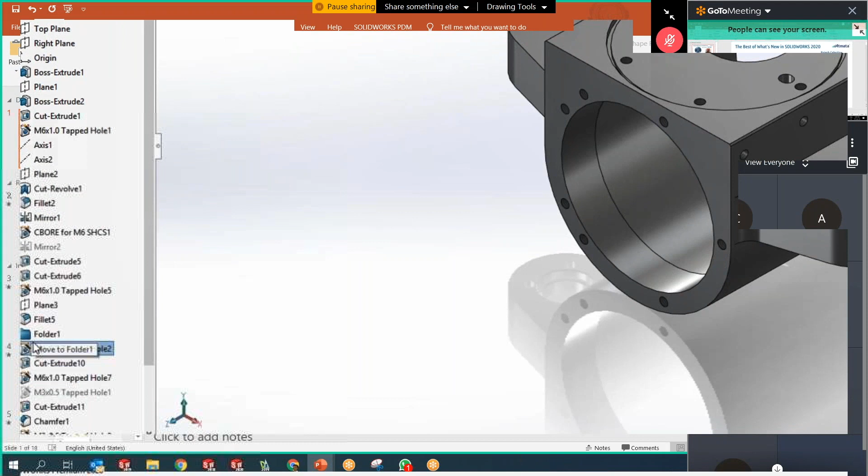So here, when I place my cursor on the command, you can see there's a small animation which tells me the procedure of doing this particular command. I can also create folders. I can select multiple features and drag them into the folder. So this is one very handy option, which is very helpful.

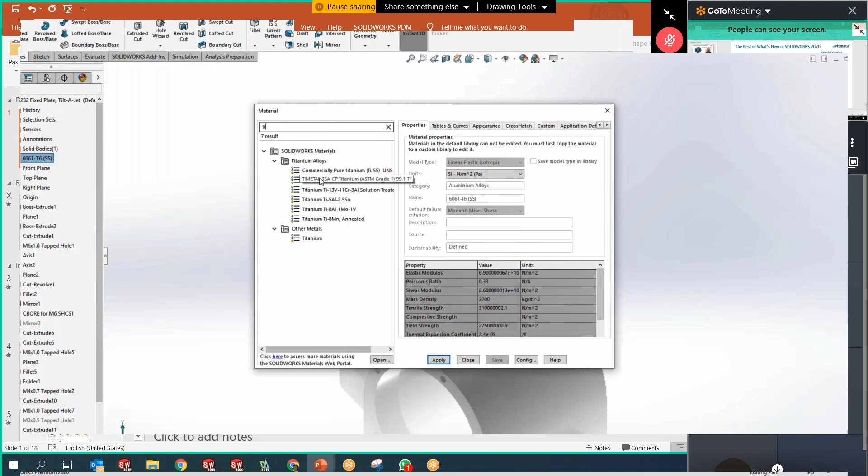With the material dialog box, I can search for materials. So if I just type the first two, three letters of my material, it's quite easy and handy to search them. So these are some of the enhancements which will help you in productivity. So here we see we have improved user interaction, and these are some of the commands which you use daily. So it makes you more handy in your daily use. Okay, with this, I complete my brief handful of what's new in 2020.